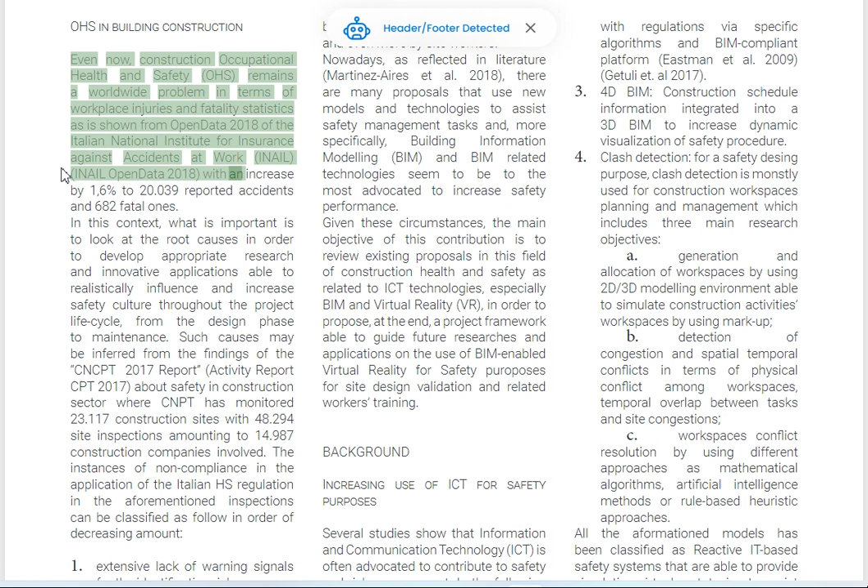Introduction: OHS in building construction. Even now, construction occupational health and safety remains a worldwide problem in terms of workplace injuries and fatality statistics, as is shown from Open Data 2018 of the Italian National Institute for Insurance Against Accidents at Work, with an increase by 1.6% to 20,039 reported accidents and 682 fatal ones.

In this context, what is important is to look at the root causes in order to develop appropriate research and innovative applications able to realistically influence and increase safety culture throughout the project life cycle, from the design phase to maintenance. Such causes may be inferred from the findings of the CNCPT 2017 report about safety in the construction sector, where CNCPT has monitored 23,117 construction sites with 48,294 site inspections amounting to 14,987 construction companies involved.

The instances of non-compliance in the application of the Italian HS regulation in the aforementioned inspections can be classified as follows, in order of decreasing amount. 1. Extensive lack of warning signals for the identification of risk zones. 2. Lack of site personnel having specific safety tasks. 3. Lack of education in terms of site planning and coordination. 4. Shallow risk analysis inconsistent with the specific construction site.

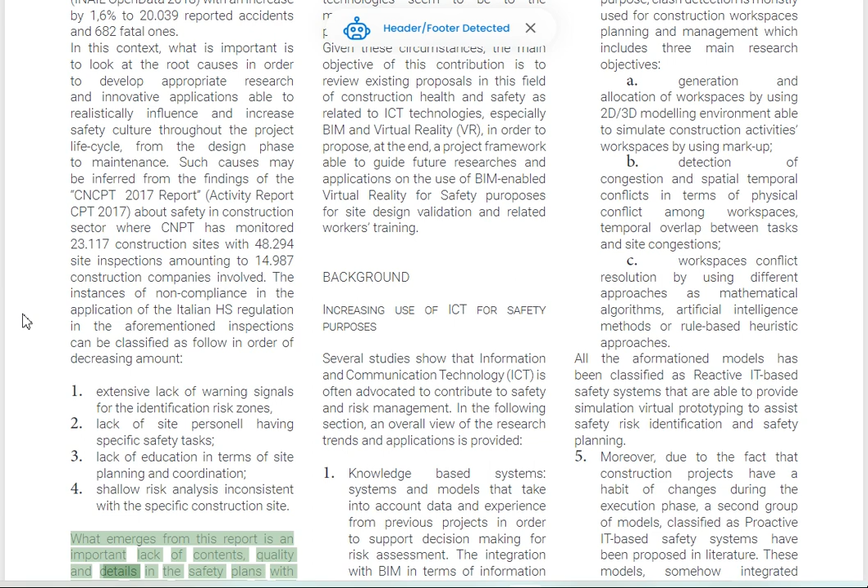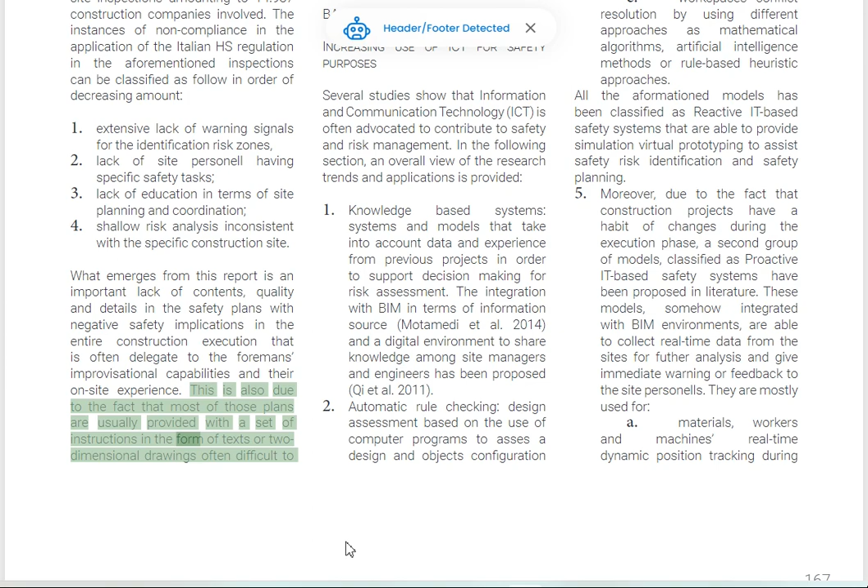What emerges from this report is an important lack of contents, quality and details in the safety plans, with negative safety implications in the entire construction execution that is often delegated to the foreman's improvisational capabilities and their on-site experience. This is also due to the fact that most of those plans are usually provided with a set of instructions in the form of texts or two-dimensional drawings often difficult to be fully understood by site technicians and even more by site workers.

Background: increasing use of ICT for safety. Nowadays, as reflected in literature, there are many proposals that use new models and technologies to assist safety management tasks and, more specifically, building information modeling and BIM-related technologies seem to be the most advocated to increase safety performance.

Given these circumstances, the main objective of this contribution is to review existing proposals in this field of construction health and safety as related to ICT technologies, especially BIM and virtual reality, in order to propose, at the end, a project framework able to guide future researches and applications on the use of BIM-enabled virtual reality for safety purposes for site design validation and related workers training.

Increasing use of ICT for safety purposes. Several studies show that information and communication technology is often advocated to contribute to safety and risk management. In the following section, an overall view of the research trends and applications is provided. 1. Knowledge-based systems: systems and models that take into account data and experience from previous projects in order to support decision-making for risk assessment. The integration with BIM in terms of information source and a digital environment to share knowledge among site managers and engineers has been proposed.

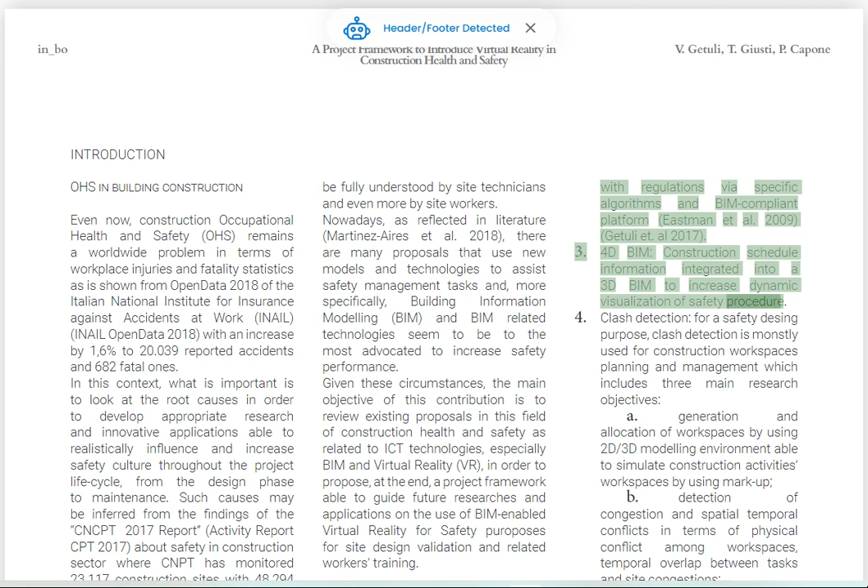2. Automatic rule checking: design assessment based on the use of computer programs to assess a design and object's configuration with regulations via specific algorithms and BIM-compliant platform. 3. 4D BIM: construction schedule information integrated into a 3D BIM to increase dynamic visualization of safety procedure. 4. Clash detection: for a safety design purpose, clash detection is mostly used for construction workspaces planning and management, which includes 3 main research objectives.

Generation and allocation of workspaces by using a 2D/3D modeling environment able to simulate construction activities workspaces by using markup. Detection of congestion and spatial-temporal conflicts in terms of physical conflict among workspaces, temporal overlap between tasks and site congestion. Workspace conflict resolution using different approaches such as mathematical algorithms, artificial intelligence methods or rule-based heuristic approaches.

All the aforementioned models have been classified as reactive IT-based safety systems that are able to provide simulation and virtual prototyping to assist safety risk identification and safety planning. 5. Moreover, due to the fact that construction projects have a habit of changes during the execution phase, a second group of models, classified as proactive IT-based safety systems, have been proposed in literature.

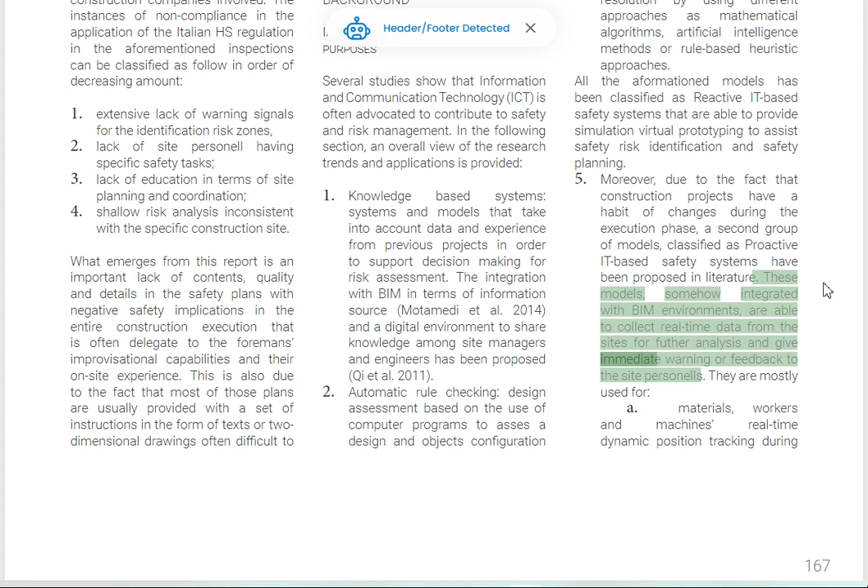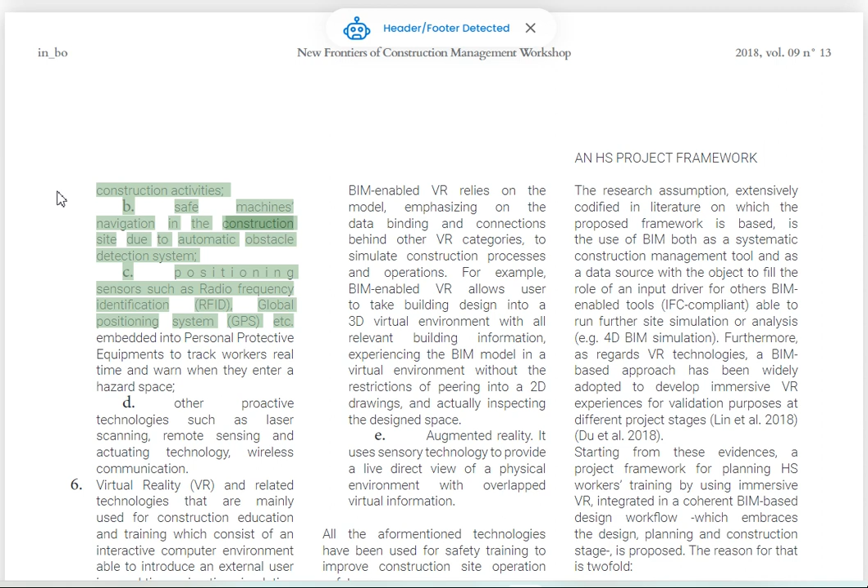These models, somehow integrated with BIM environments, are able to collect real-time data from the sites for further analysis and give immediate warning or feedback to the site personnel. They are mostly used for materials, workers, and machines' real-time dynamic position tracking during construction activities. Machine navigation in the construction site due to automatic obstacle detection systems. C. Positioning

Sensors such as radio frequency identification, global positioning system, etc., embedded into personal protective equipment to track workers in real time and warn when they enter a hazard space. Other proactive technologies such as laser scanning, remote sensing and actuating technology, wireless communication.

6. Virtual reality and related technologies that are mainly used for construction education and training, which consist of an interactive computer environment able to introduce an external user in a real-time animation simulating the real works. These applications can be classified as follows. Desktop-based VR that displays a 3D virtual world of the construction site environment on a desktop screen without any tracking equipment to support. It relies on the worker's spatial and perception abilities to experience what happens around them. Most of the tasks can be conducted through the use of mouse and keyboard.

Immersive VR that relies on the use of special hardware, such as the head-mounted device and sensor gloves, to withdraw users from the physical world and provide an environment more immersive and interactive than other technologies. 3D game-based VR. It is an engine able to produce a computer-based video game that provides an interactive virtual reality of the site environment, also using a multi-user operating technology. BIM-enabled VR.

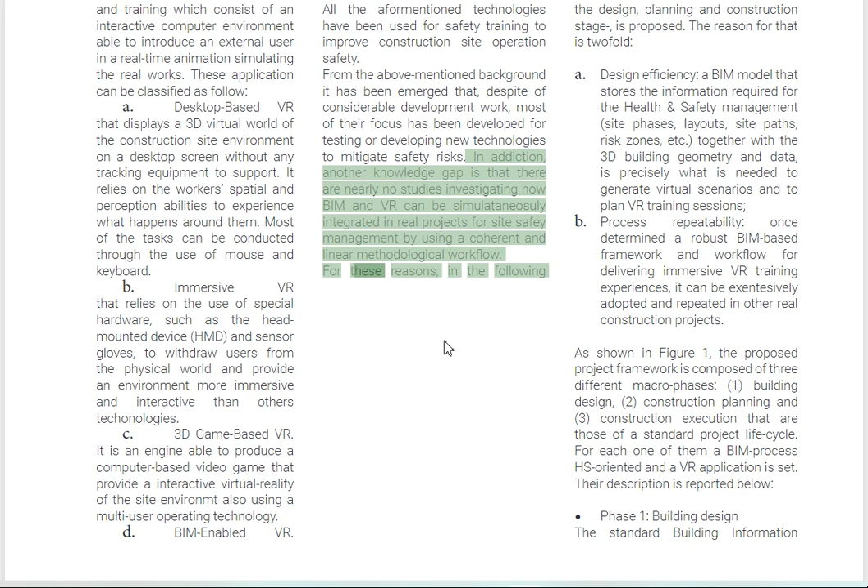In addition, another knowledge gap is that there are nearly no studies investigating how BIM and VR can be simultaneously integrated in real projects for site safety management by using a coherent and linear methodological workflow. For these reasons, in the following, an HS project framework. The research assumption, extensively codified in literature, on which the proposed framework is based, is the use of BIM both as a systematic construction management tool and as a data source with the objective to fill the role of an input driver for other BIM-enabled tools able to run further site simulation or analysis.

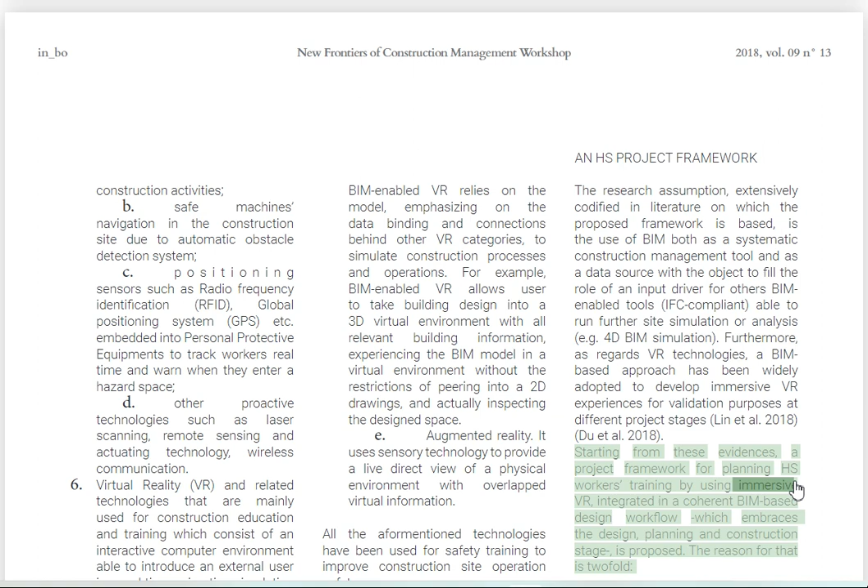Furthermore, as regards VR technologies, a BIM-based approach has been widely adopted to develop immersive VR experiences for validation purposes at different project stages. Starting from this evidence, a project framework for planning HS workers' training by using immersive VR, integrated in a coherent BIM-based design workflow which embraces the design, planning and construction stages, is proposed. The reason for that is twofold.

A. Design efficiency. A BIM model that stores the information required for health and safety management together with the 3D building geometry and data is precisely what is needed to generate virtual scenarios and to plan VR training sessions. B. Process repeatability. Once determined, a robust BIM-based framework and workflow for delivering immersive VR training experiences can be extensively adopted and repeated in other real construction projects.

As shown in Figure 1, the proposed project framework is composed of 3 different macro phases: building design, construction planning and construction execution, that are those of a standard project life cycle. For each one of them, an HS-oriented BIM process and a VR application is set. Their description is reported below.

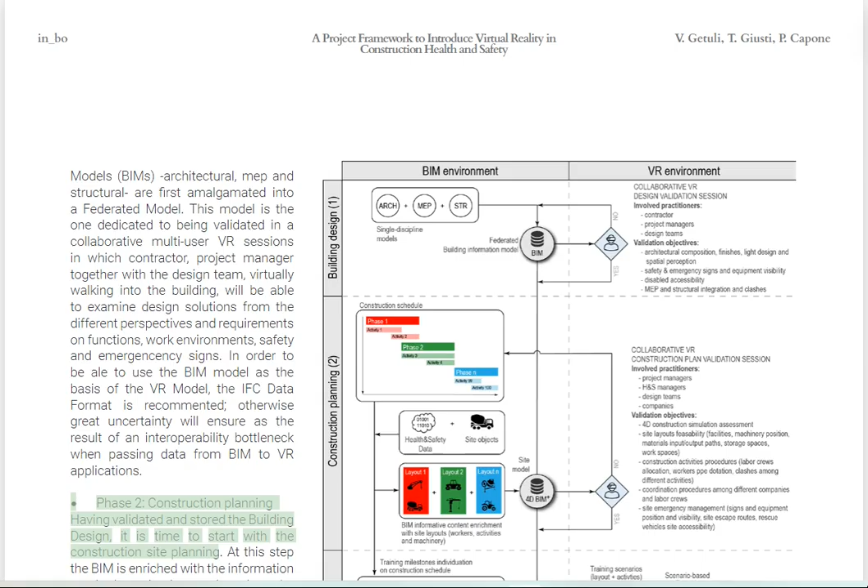Phase 1, Building Design. The standard building information models, architectural, MEP and structural, are first amalgamated into a federated model. This model is the one dedicated to being validated in collaborative multi-user VR sessions in which contractor, project manager together with the design team, virtually walking into the building, will be able to examine design solutions from the different perspectives and requirements on functions, work environments, safety and emergency signs.

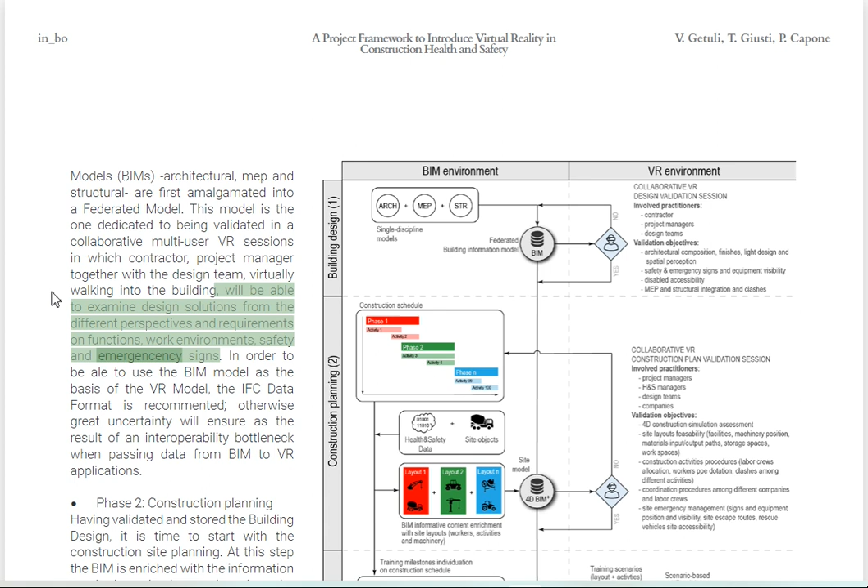In order to be able to use the BIM model as the basis of the VR model, the IFC data format is recommended, otherwise great uncertainty will ensue as the result of an interoperability bottleneck when passing data from BIM to VR applications.

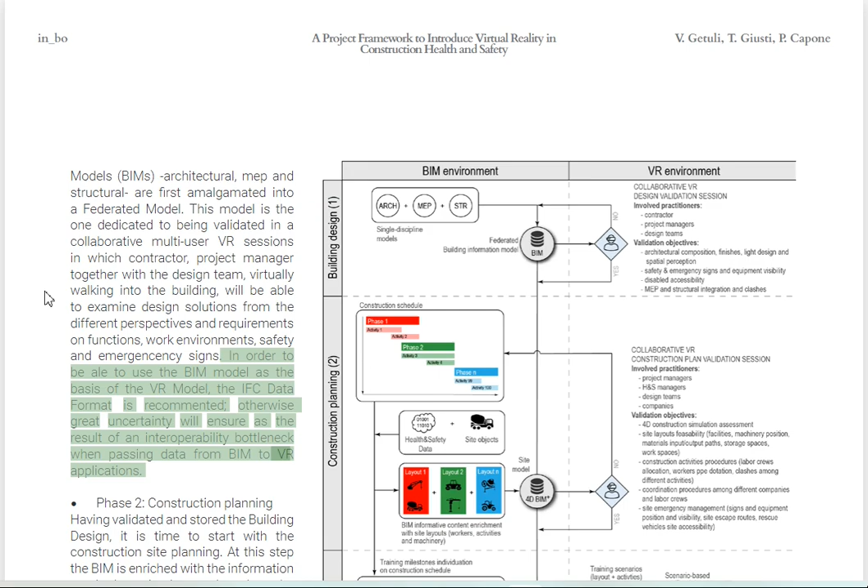Phase 2, Construction Planning. Having validated and stored the building design, it is time to start with the construction site planning. At this step the BIM is enriched with the information required to simulate and analyze the construction process in terms of site progression. According to the HS Manager experience, the construction schedule, in terms of construction phases and activities, with the relevant health and safety data and site objects concur to build a complete site information model. The given SIM is now ready to be exported in a 4D BIM simulation environment in order to visualize the proposed activities progression.

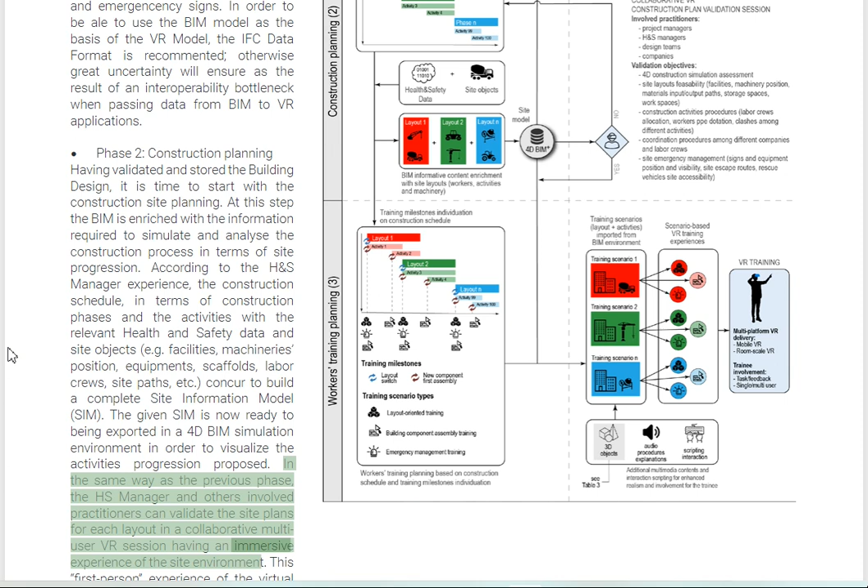In the same way as the previous phase, the HS Manager and other involved practitioners can validate the site plans for each layout in a collaborative multi-user VR session, having an immersive experience of the site environment. This first-person experience of the virtual site allows to evaluate its feasibility in terms of position of facilities, equipment and machinery, storage areas, materials input and output paths, workspaces management and risk zones.

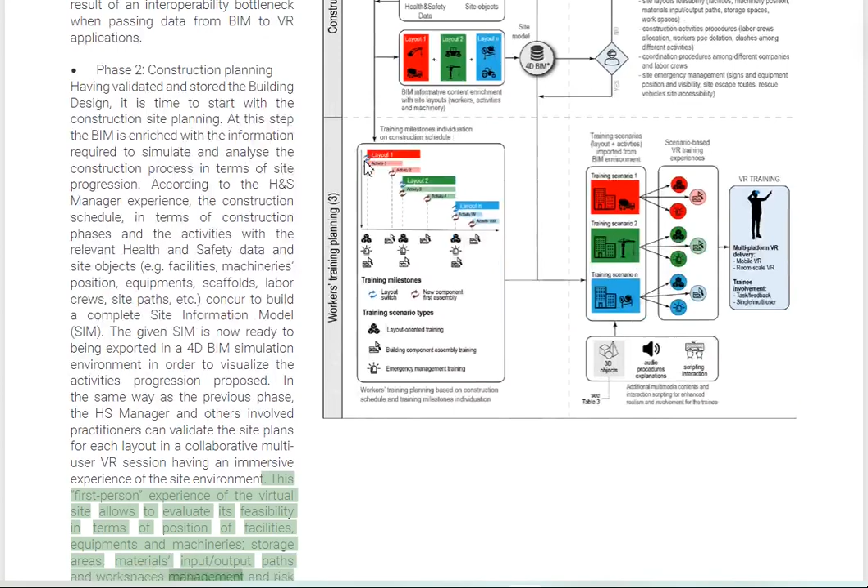In addition, construction activities related to specific building objects should be represented in terms of required workspaces to be constructed in order to be later able to validate safe procedures, personal protective equipment and accidental clashes in a VR site model up to date. An extensive explanation of this approach has been proposed by the authors.

By using this BIM, it is also possible to instantly set and share coordination procedures among different companies and validate site emergency management measures. Once again, to preserve interoperability, it's crucial to deliver the site information model optimized for VR collaborative validation sessions in an IFC format.

Phase 3, Workers' Training Planning during the construction execution. At this stage site plans are validated and the project is going to enter the construction phase. In the proposed framework, the HS Manager will use the validated site information model to plan immersive VR training sessions for education and coordination of workers on site.

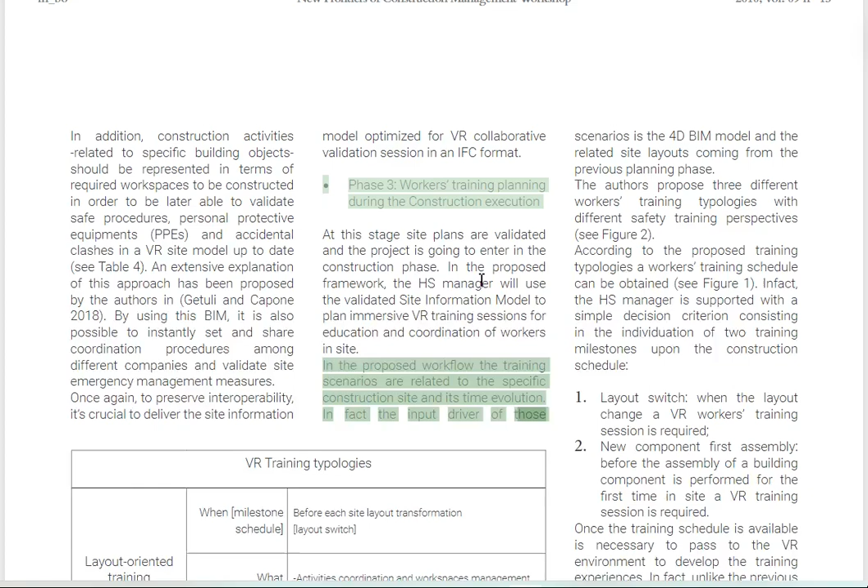In the proposed workflow the training scenarios are related to the specific construction site and its time evolution. In fact, the input driver of those scenarios is the 4D BIM model and the related site layouts coming from the previous planning phase. The authors propose 3 different workers' training typologies with different safety training perspectives.

According to the proposed training typologies, a workers' training schedule can be obtained. In fact, the HS Manager is supported with a simple decision criterion consisting in the individuation of 2 training milestones upon the construction schedule. 1. Layout switch: when the layout changes, a VR workers' training session is required. 2. New component first assembly: before the assembly of a building component is performed for the first time, a VR training session is required.

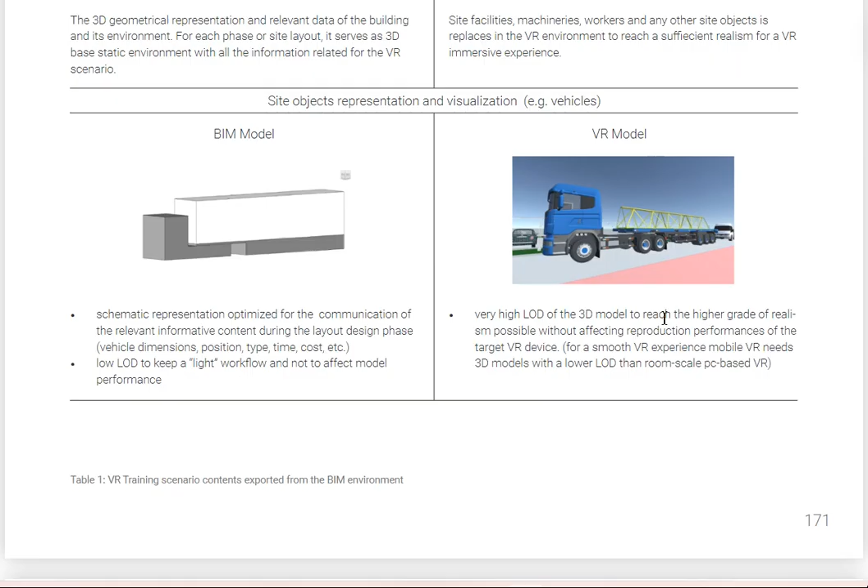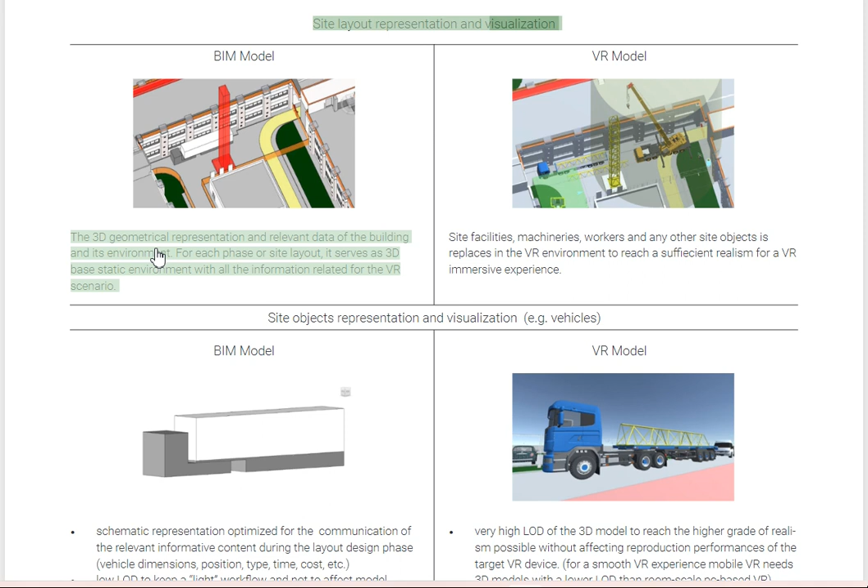Site layout representation and visualization. The 3D geometrical representation and relevant data of the building and its environment. For each phase or site layout, it serves as 3D base static environment with all the information related for the VR scenario. Site facilities, machineries, workers and any other site objects are replaced in the VR environment to reach a sufficient realism for a VR immersive experience.

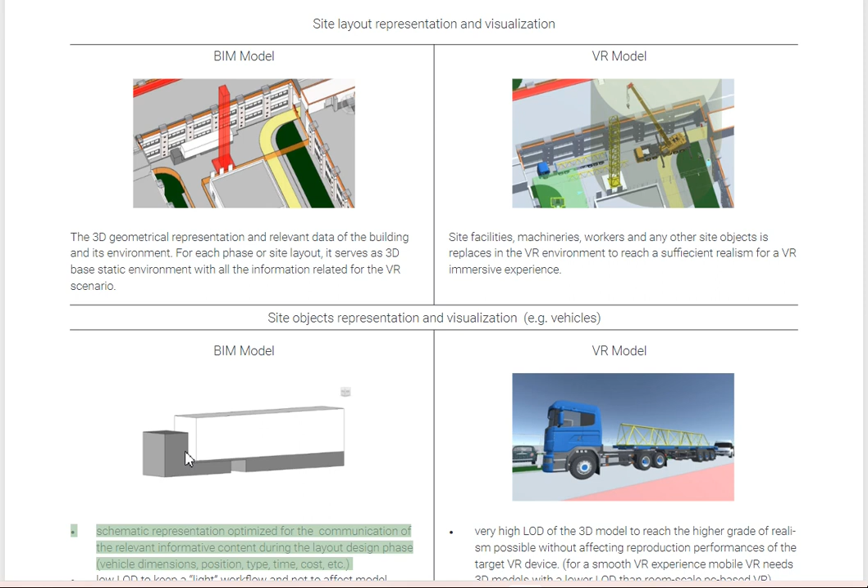Schematic representation optimized for the communication of the relevant informative content during the layout design phase. Low LOD to keep a light workflow and not to affect model performance. Very high LOD of the 3D model to reach the higher grade of realism possible without affecting reproduction performances of the target VR device. BIM model.

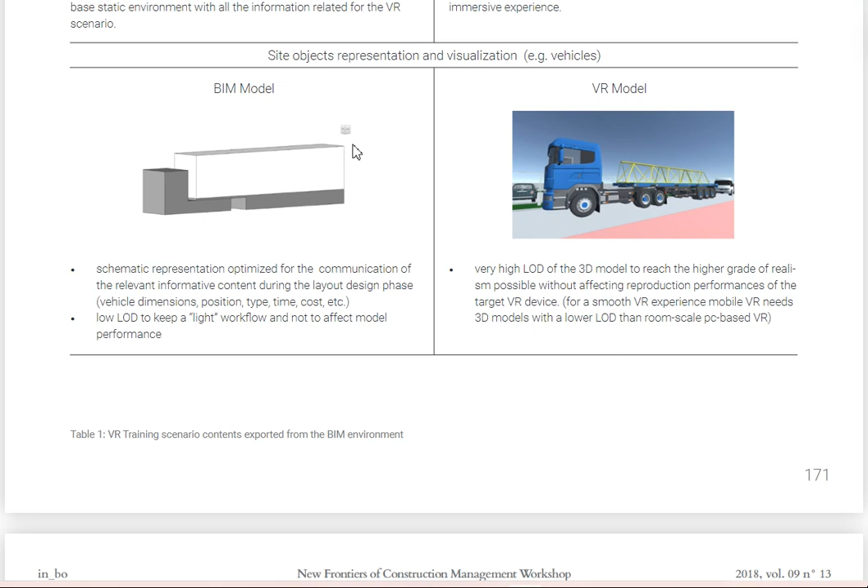Table 2, VR training scenario contents exported from the BIM environment. Table 3, VR training scenario contents added in a VR application. Building and environment 3D model and data. The 3D geometrical representation and relevant data of the building and its environment. For each phase or site layout, it serves as 3D base static environment with all the information related for the VR scenario.

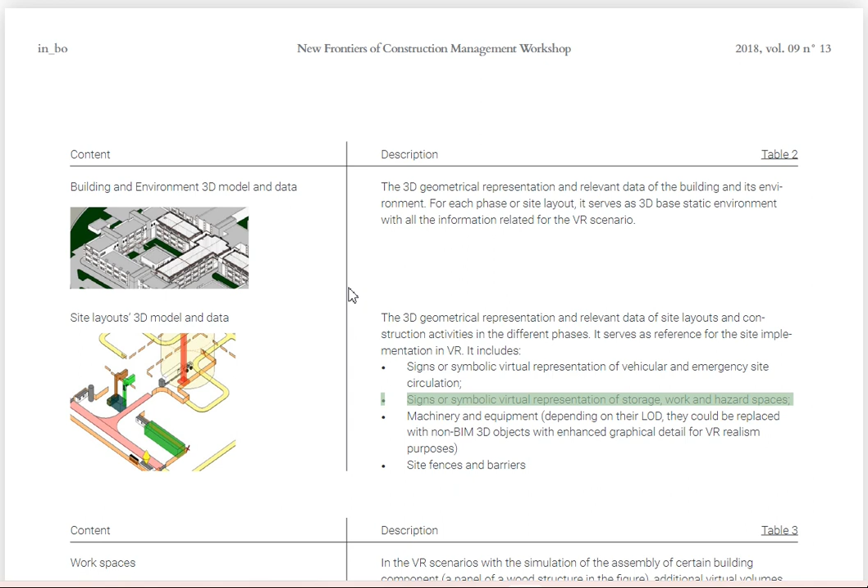Site layouts 3D model and data. The 3D geometrical representation and relevant data of site layouts and construction activities in the different phases. It serves as reference for the site implementation in VR. It includes signs or symbolic virtual representation of vehicular and emergency site circulation. Signs or symbolic virtual representation of storage, work and hazard spaces. Machinery and equipment. Site fences and barriers.

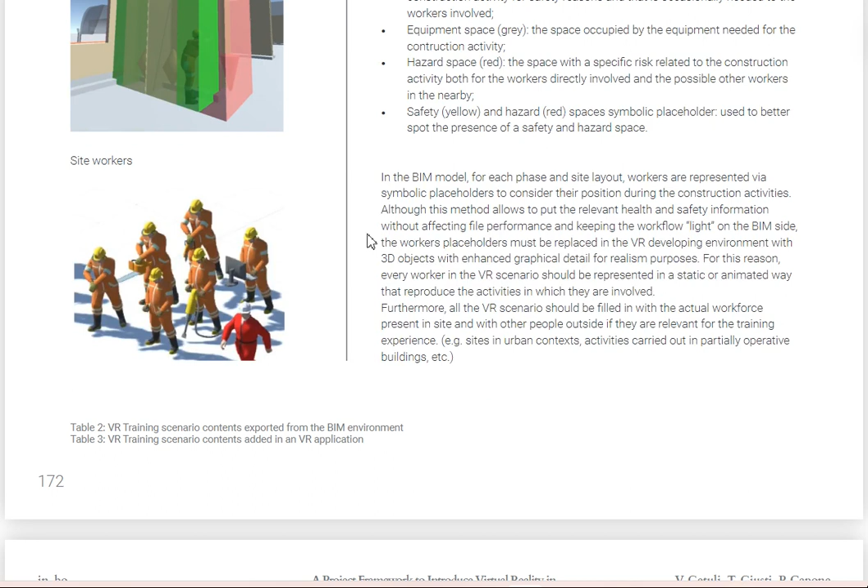In the BIM model, for each phase and site layout, workers are represented via symbolic placeholders to consider their position during the construction activities. This method allows to put the relevant health and safety information without affecting file performance and keeping the workflow light on the BIM side. The workers' placeholders must be replaced in the VR developing environment with 3D objects with enhanced graphical detail for realism purposes. For this reason, every worker in the VR scenario should be represented in a static or animated way that reproduces the activities in which they are involved.

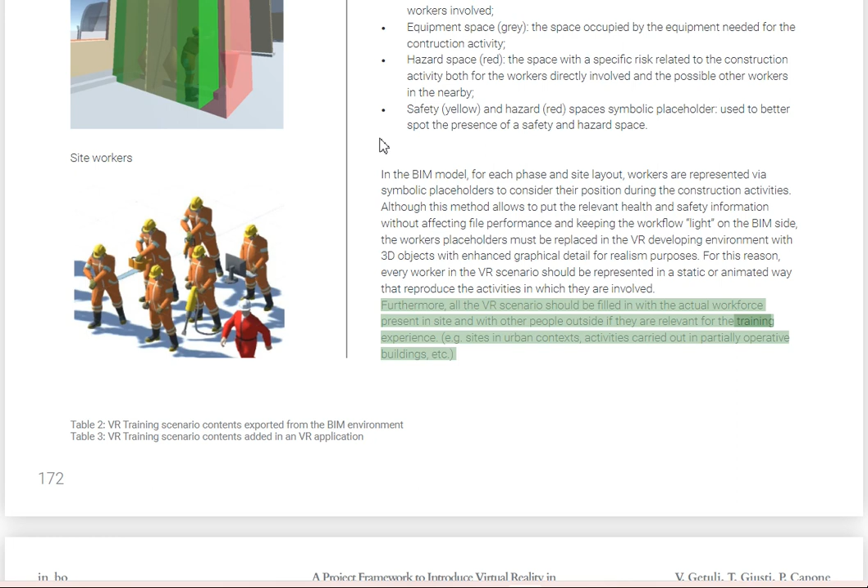Furthermore, all the VR scenarios should be filled in with the actual workforce present on site and with other people outside if they are relevant for the training experience. The 3D geometrical representation and relevant data of site layouts and construction. In the BIM model, site machinery is represented in its operative position and with a virtual volume of its working space. Usually the BIM objects that stand for them have a rather low LOD and should be replaced in the VR developing environment with 3D objects with enhanced graphical detail for realism purposes.

The replacement must keep the relevant health and safety information from the BIM environment and never lead to a misrepresentation in the position, type, dimension, working space and operational procedures.

Elements that help users to understand the environment they are in. In the BIM model, for each layout and construction phase, site facilities are usually represented in their current position along with storage spaces and other auxiliary elements. Not always these facilities have a 3D representation, and even in those cases they have a rather low LOD.

For this reason they should be replaced in the VR developing environment with 3D objects with enhanced graphical detail for realism purposes. Each element replaced or added must be coherent with the site layout modeled in the BIM environment.

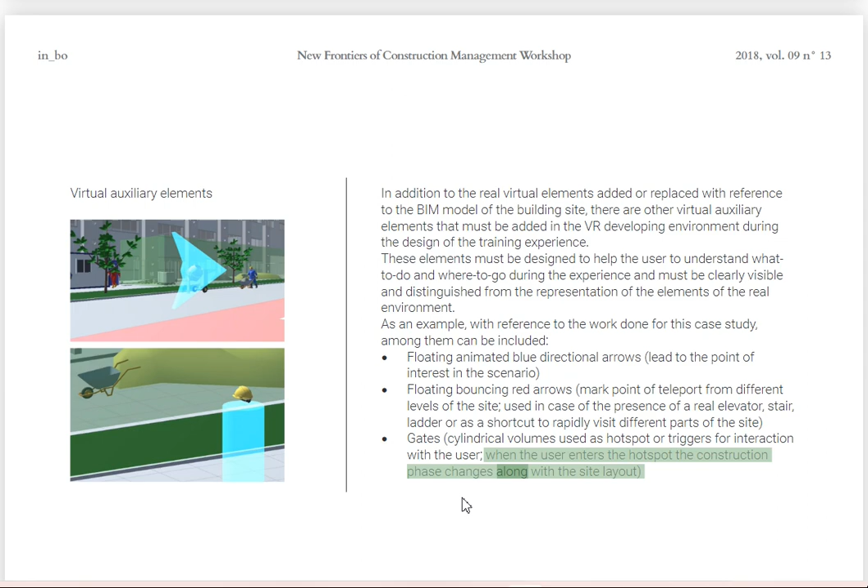Furthermore, there are additional content sets that the authors propose to implement in the VR scenarios that serve for realism and immersiveness purposes. Audio contents: sounds from the site environment and related to the simulated activities, audio explanation of work procedures and other experience support instructions. Interaction: scripting of the interaction between the trainee and the site objects or with other virtual objects.

Discussion. The proposed model will be tested by the authors in 2 different Italian case studies in order to be validated. In terms of VR developing technologies, that were not the object of such a contribution, the authors refer to cross-platform game engines dedicated to the creation of multimedia interactive digital contents deliverable for many different platforms from PC to mobile devices.

Mainly designed for game development, these engines are broadly adopted also to create interactive virtual reality environments with the combination of 3D models and other multimedia contents from every compatible source. The customization possibilities offered through code scripting have spread the adoption of these engines also far from the entertainment industry, and they are more often used for research purposes and complex simulations.

Nowadays, unlike many industry and educational sectors where these engines are used to develop custom VR training experiences, in the AEC industry they are often relegated to project validation sessions. Without prejudice to the importance of the validation purposes, for which commercial user-friendly VR platforms already exist, in the authors' opinion the adoption of these engines is essential to develop the needed training contents in terms of realism and interactivity.